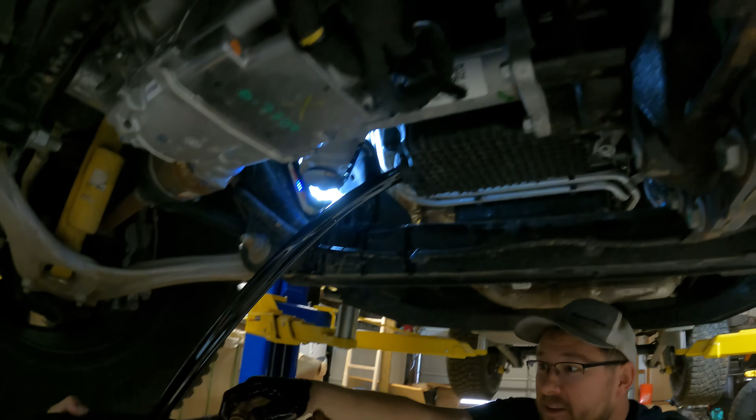I'm a little jealous, but we're in the shop. We're gonna get a lot of stuff done today and over the next few days. We're just gonna hop right to it.

This is a kind of small shop, 30 by 40, 1,200 square feet. Really, compared to what I've had in the past, it is amazing. But in order to maximize the room in this shop, the plan is to build a loft in this corner. The setup for the shop, we have the lift, and Cassie and I built a workbench over here in the corner. This is gonna be our primary work zone. We're gonna have another bench here, and welding and whatnot's gonna be over in this section.

Over in this corner, we didn't really have any plans for it, so this is gonna be the chill corner. We're gonna have a loft so the kids can go up there and play, have a little couch in the corner, and then have storage up over here.

So first things first, we have to build the loft. It's just like that rear winch, simple, you just build a loft. How hard can it be? Just like every other project. Do we have the supplies needed to start this? Probably not. Do we know exactly what we're doing? Of course, we have the baseline. Let's do it.

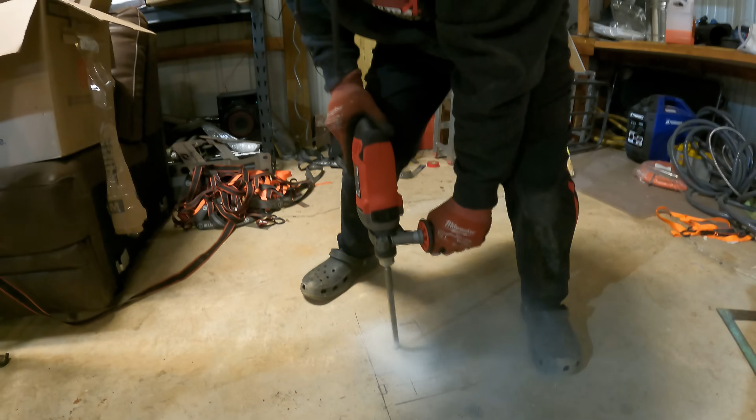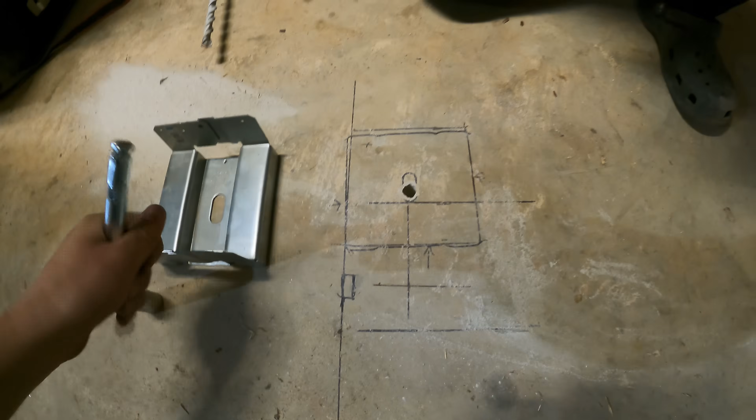We use the post and the 2x10s to square everything up and mark our base plate. So we just drilled a 5/8 hole in the concrete and we have this anchor bolt. That plate is gonna anchor our post and this is gonna tighten down and expand in the concrete.

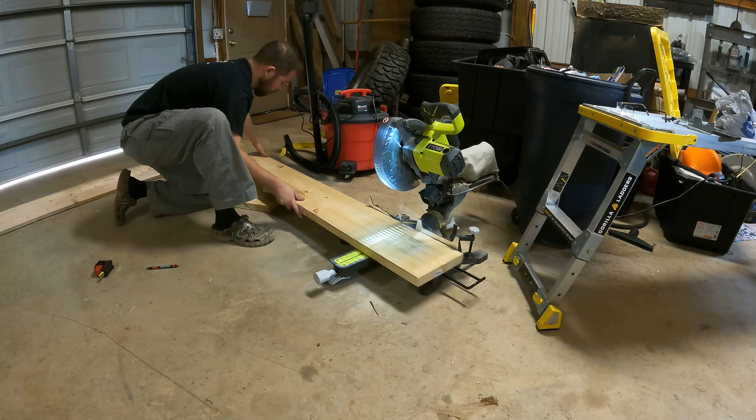I've pretty much come to a complete halt on the loft build. All the 2x10s are in place, this thing is secure. I did some swinging under here to make sure it was all good, and I went ahead and put some old 2x4s up there as temporary flooring so I could crawl up there and make sure everything is secure. Let me tell you, this thing is not going anywhere. We're still gonna tie it in, I'm gonna do some triangulated brackets on each corner.

For now, I need to figure out what kind of floor we want to do. The 2x4s, while they're nice and sturdy, that's definitely not a good floor for the kids to play on up there, as well as the ladder going up. We're either gonna do a side ladder out of wood, or put the ladder up against that wall, recess it, and have a cutout on the floor so you walk up and over. But it is time to go ahead and head over to Mike's.

We're gonna change out all of the beadlock bolts on mine because they are looking really, really rough. Sadly, living down in South Texas, it's bad on these bolts. Hopefully none of these break on the way out, but you can clearly tell they're heavily corroded. So we got a bag of grade 8 hardware over there, we're gonna swap these out and keep on going.

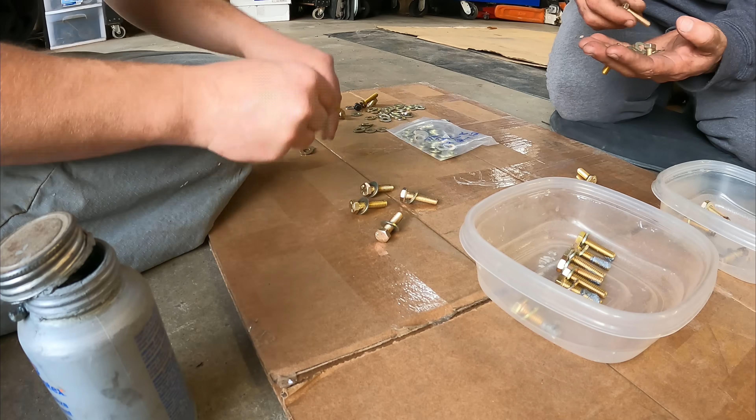We went ahead and got all 4 wheels swapped with new grade 8 hardware, new beadlock bolts. So Mike helped out, thanks Mike. But the big thing is, whenever your beadlocks start rusting, or if you just had them for a few years, you definitely want to change out that hardware because that's what holds your bead together when you're going down the road.

Luckily, we have a store here in town, Barton Bolt. Great place, they do have an online store, grade 8 hardware, all kinds of fasteners. Go check them out, their prices are unbelievable. They beat everything else, Fastenal, your Home Depot prices are insane there, very low. Tractor Supply, yeah, it beats them all.

So we swapped all of those over. I think it cost what, 40 bucks for the bolts and washers, 60, I don't know. Online it was looking like it was gonna be 200. So that is done.

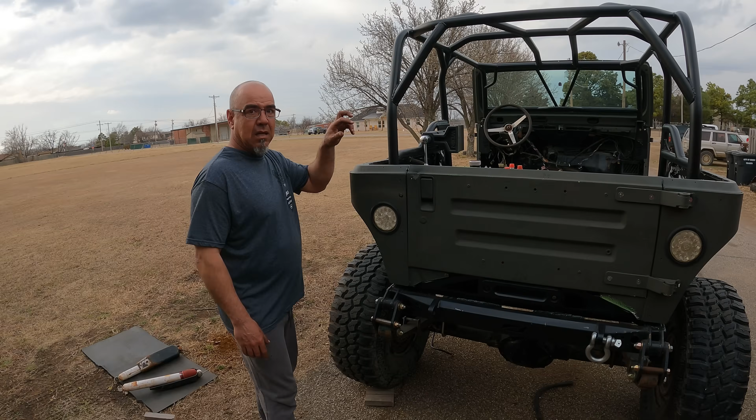Mike spent the past three weeks working on this, and it turned out really, really good.

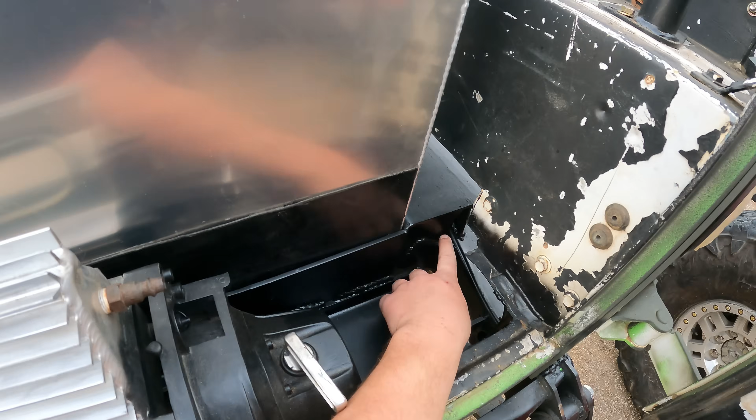You had a custom fuel cell mount made. Yep, we used a Barnes 4-wheel drive 30-inch winch mount, and everything else kind of fabbed together. It turned out really, really good. It's welded over here to the frame right here, multiple spots all over. And we cut the body out. It turned out really good.

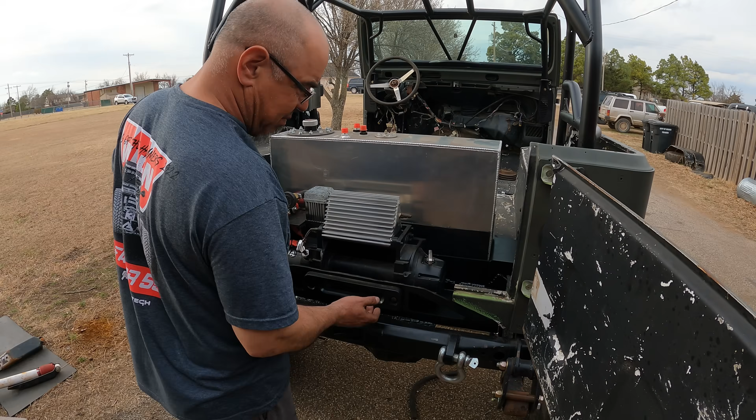Once we figured out our plate setup for how much depth under the tailgate, I didn't want it through the bumper because everybody always goes through the bumper. Welded the 30-inch to the gas tank mount, and it was all quarter-inch steel. It is real tight.

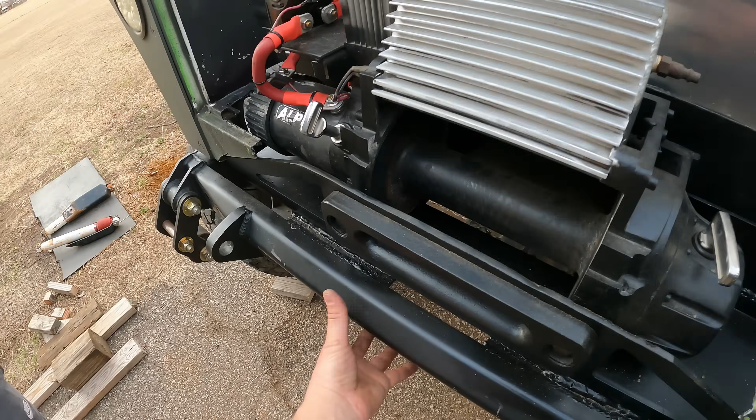Down in here, we are gonna have to massage the brackets to hold the gas tank down. The good thing here, you open the tailgate and you have room to change your winch cable if needed, unspool it if it's kinked up. When it's up inside the bumper, way in there, it's super hard to get to.

Now you have a winch and an air compressor. This is the ranch's off-road recovery rig, so of course having a winch on the front and rear is a no-brainer for a recovery rig that's gonna be pulling people out of who knows what.

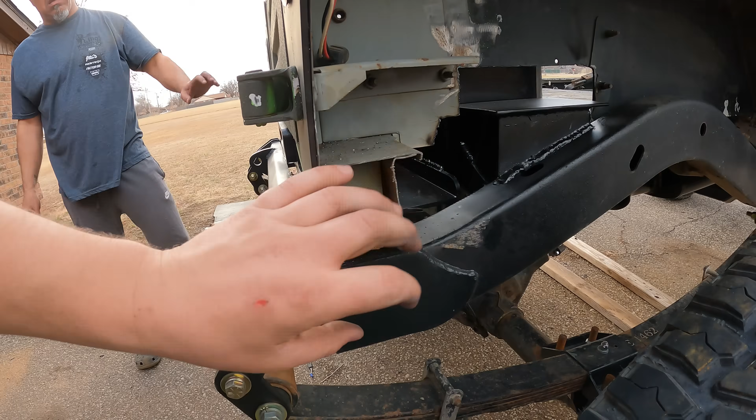So there's still more work to be done. You gotta brace the corners, and either make a body mount here or tie the cage into the body a little bit and then into the frame. Got some work to figure out, but it is coming along good.

So I'm actually up here on the loft now, and if you're standing on the corner there is plenty of room, but back up in there, that is definitely kid zone for sure.

So I went ahead and got the floor in. I used two sheets of 3/4 inch sanded plywood, and it was the perfect amount. A 4x8 here, and then a sliver there, and the other sliver fit right in there.

The next step, as you can tell, is carpet. This has like a red tint to it. The lighting up here is horrible, but I figured it would kind of look good, plus this is extremely cheap. I really lucked out on this. This was from Ollie's, I think it was 65 bucks, and I would love to say that I planned this out, but I didn't.

The width is perfect, this is like a 12x8, so all I have to do is unroll it, make one cut, staple it up here. Of course, add some safety handrails right here. But this thing is sturdy, it's not going anywhere.

We're gonna finish this up tonight, which means the loft project is done, and we gotta bring the JK in here, put her up on the lift, and make some changes on that thing. But let's get this stapled down first.

So we got the whole crew in here. We got Cassie, we got Mike, we got the LJ, we got the JK. We're missing a CJ—Mike, where's yours? Running. Running? Running and driving. You're talking crap about the JK right now? And it runs. All right, put it on the trailer, take it to the trail.

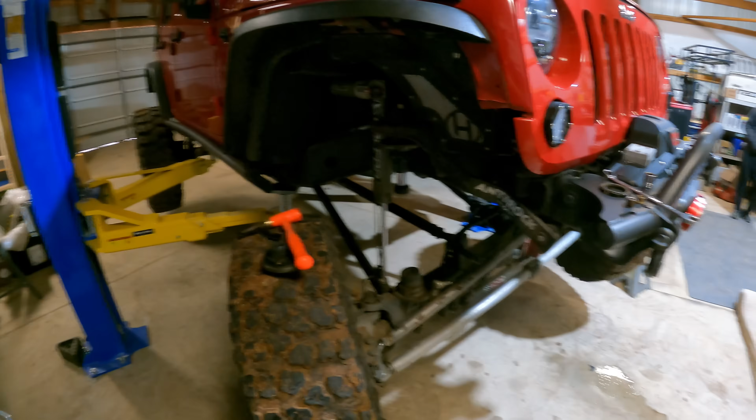So today's project is to swap over to the Rock Krawler 3.5 diesel spec springs. Let me put these down—these are quite heavy. These are the diesel spec springs for the JL JT 3.5 inch with the EcoDiesel engine, and what this is doing is giving us a better spring rate.

Now, why do I need that? Mostly it's because of the 392 Hemi. What I noticed is we didn't lose too much ride height, however the Hemi being heavier, the spring rate on the front end just felt way too soft, uncontrolled, not really stable. So by going to a stiffer spring rate, it's gonna be perfect on this Jeep.

Now there's a bunch of differences between linear spring rate, dual rate, triple rate, coilovers, and there's just a ton of different spring options. So sometimes it can seem hard or a little bit confusing to figure out what springs you want for your Jeep. So I did a real quick whiteboard demonstration over here.

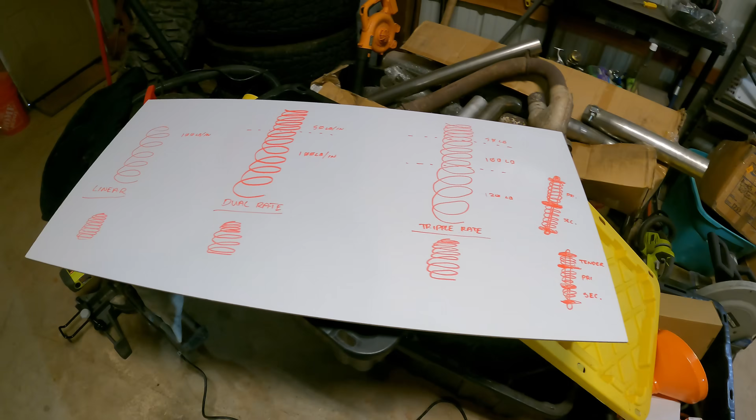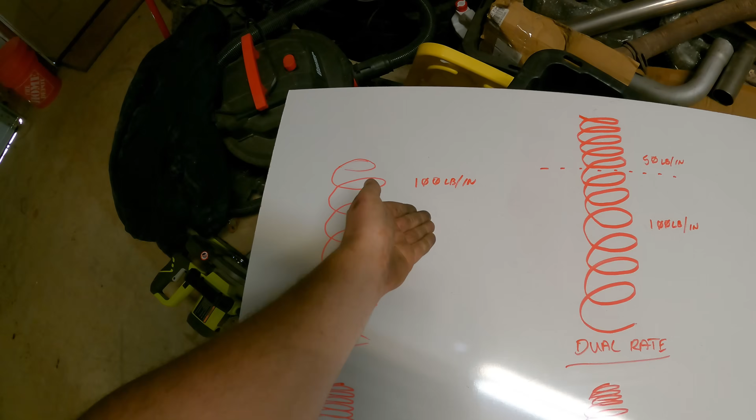We're gonna start off with a linear spring. A linear spring, for example, might have a 100-pound spring rate. So all the way through, if you put 100 pounds on here, it's gonna compress 1 inch. So if we put 300 pounds on this spring, it's gonna compress 3 inches. So that's your linear rate spring. That's what comes from the factory.

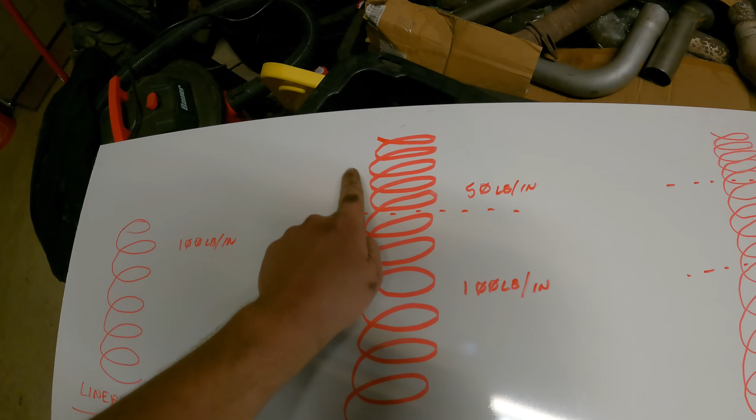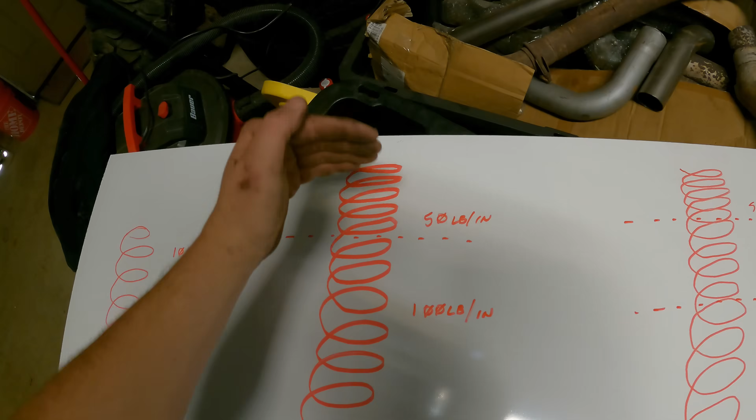Very basic design. We're gonna step up to a dual rate. A dual rate has a different spring rate on top, and then the coils open up to a different spring rate. For this example, the top is 50 pounds per inch. Most of the time that's gonna be fully compressed, unless we're flexed all the way out, this is gonna expand in our coil bucket. It's not really gonna do much because this is mostly for the bucket, just staying in there. Then we move over to the 100 pound per inch spring rate, which is very similar to that, but we added a little bucket on top.

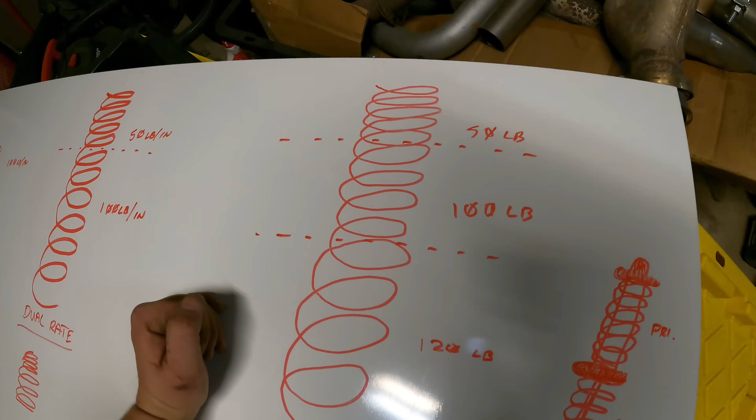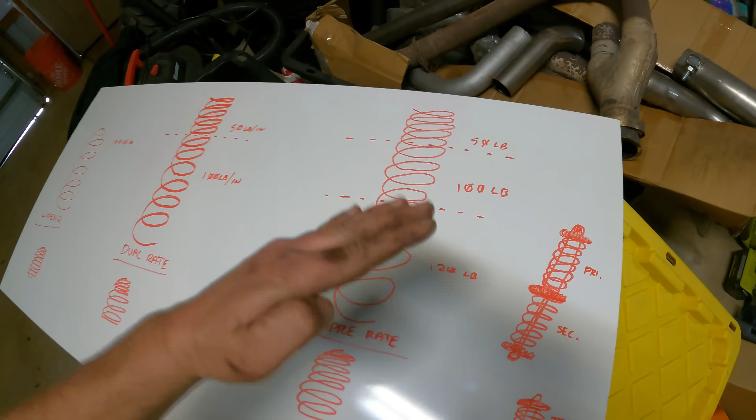Now we're gonna move over to a triple rate spring, and just like it sounds, there are 3 different rates. In this example, we did a 50-pound, 100-pound, and 120. So a benefit of a triple rate over something like this is that not only do we have the 50 and 100 for the smaller, squishier bumps, but we add a 120 in here for some of those bigger bumps that can really absorb it without bottoming all the way out.

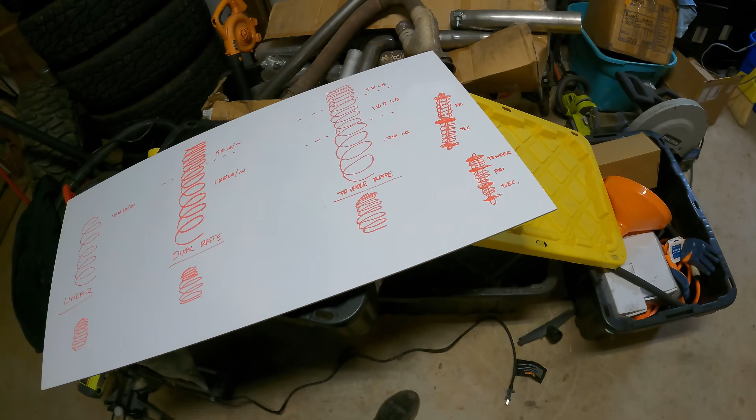So linear, dual rate, and triple rate are your basic designs for springs. Triple rate's gonna be Rock Crawler, and it seems like a lot of other companies are following suit with the triple rate spring. So of course, we have an example of a dual rate coilover right here and a triple rate coilover. As you can tell, it's very similar to these springs, but with coilovers, you can really dial it in to exactly what you want. Now in the future, the JK is gonna get coilovers, but I really wanna make sure that we do it the right way, and I really wanna have enough time to explain it to you guys.

But with that being said, we are switching over to 3.5 inch Rock Crawler springs. We're gonna see what it looks like. It should feel better. Hopefully it doesn't give us too much lift, but with the engine, I think it's gonna be perfect. That was a lot of talking, a lot of good info.

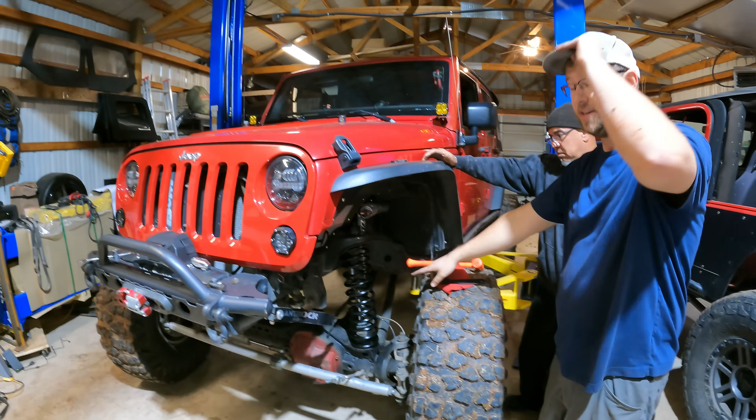So I just talked to Rock Crawler. The diesel springs' primary spring rate is 175 compared to the JK front springs, which are 155. So we got an extra 20 pounds per inch up here, which I think should do it. I don't think it's gonna give us any extra ride height though. I think we're gonna be in the same ride height, but with a better spring rate suited for the Hemi.

Pull it out of the garage and see what it looks like.

Door was open. Oh God. Oh, oh man. Oh, all of those times back in Virginia when I got yelled at for driving through the ditch of doom, and she leaves marks in our nice field that has some— oh my, I was just showing them our nice crop that we're growing. What do you think it is? I have no idea. There's corn or something up here, but it doesn't look like last season had much. So I have no idea what it is.

That's honestly the perfect stance right there. It still has a tiny amount of rake, but it's not obsessive. So the stance is good, the ride height is good, but we're gonna have to take this thing wheeling to actually get a feel for the spring rates. I've been running the old JK Rock Crawler springs for a couple years now, and I really did like the way they rode, but with the Hemi, it was just a little too soft from the extra weight.

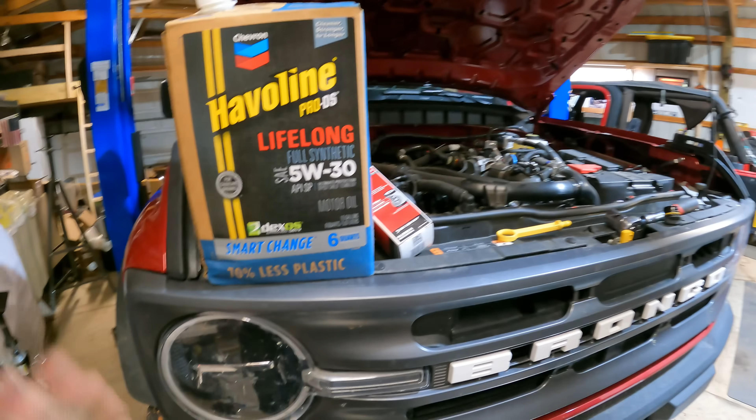The 2.7 is supposed to use 7 quarts. A lot of people are saying they only get 6 out and 6 in before it's full. That's probably because this is twin turboed, so you have all the oil feed and return lines for the turbos, and that oil doesn't all drain down. That's probably where that extra quart goes.

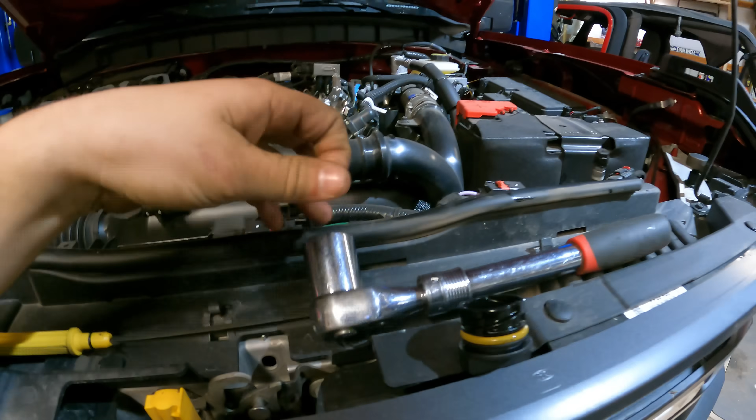Before we start the oil change, we're gonna pull everything out and make sure we have a very important socket. It's supposed to be a 27 millimeter, but ours is somewhere in a box, so an inch and 1/16 is pretty close to pull off this plastic oil filter cap.

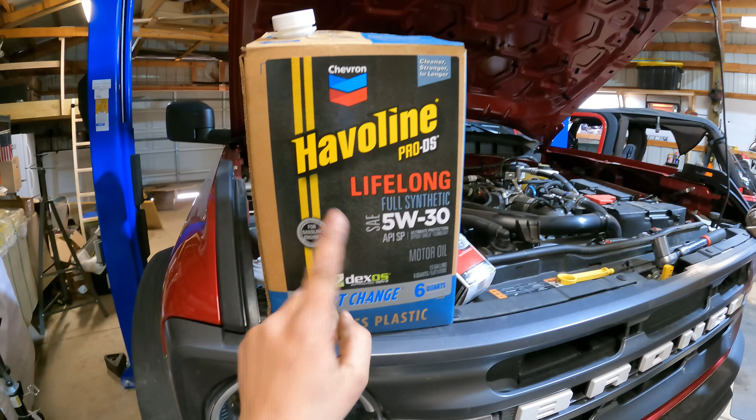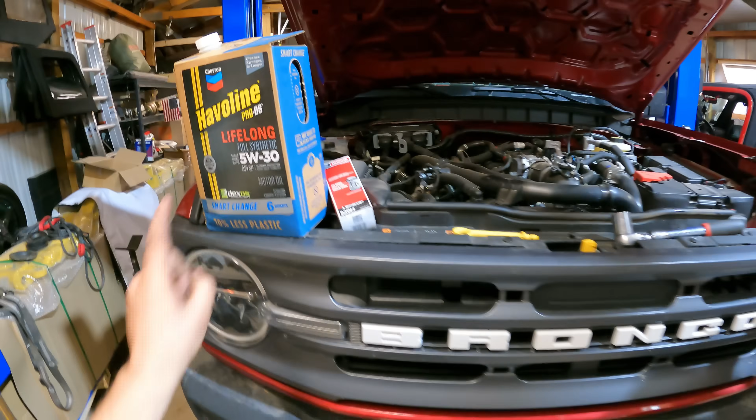We are gonna go ahead and get the Bronco oil change done. We're gonna have to raise this up, and it's gonna take us an hour. We're gonna figure this thing out. So it's not a bolt, it's a plastic contraption. I don't know, Ford.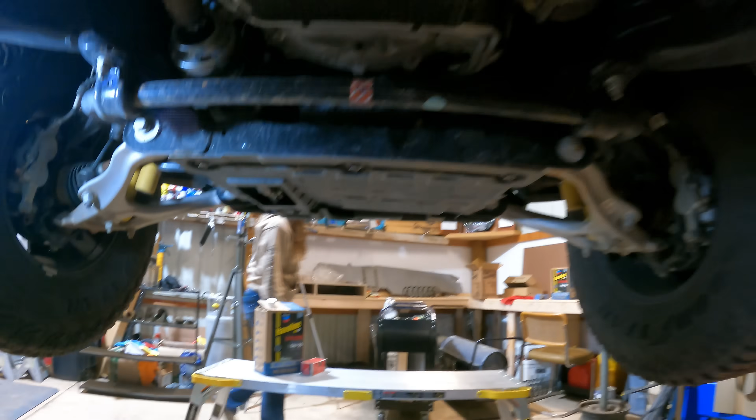What are you looking at, Mike? The plan is to rearrange that truss up, use steel and do a cutout inside there so we can lift it all the way up. But what I was just saying about the Ford crap up in here — we have to drop this factory skid plate. I don't know if you'll be able to see it in there, it's actually on this side.

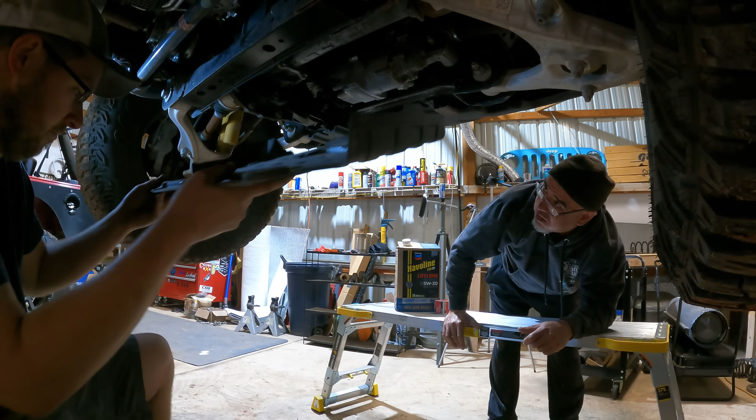There we are. So that is our oil pan, a plastic oil pan, which is fine because we have skid plates to cover it up. But this is what Ford likes to use as a drain plug, and I've never used this before, but I don't like them. Probably tells us exactly how to do it in the owner's manual.

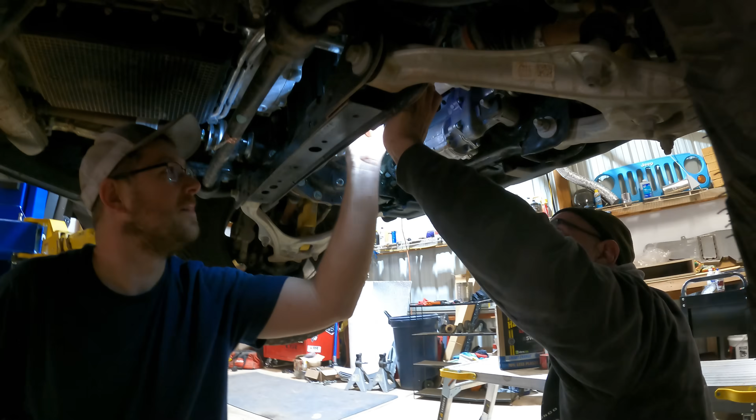How many men does it take to do an oil change? There's no better way — you can't even get your hands up in there to get them out of the way. Oh man, here we go. Oh my, that is horrible design. That is just the worst design I've ever seen. Hey Cass, get the other one ready.

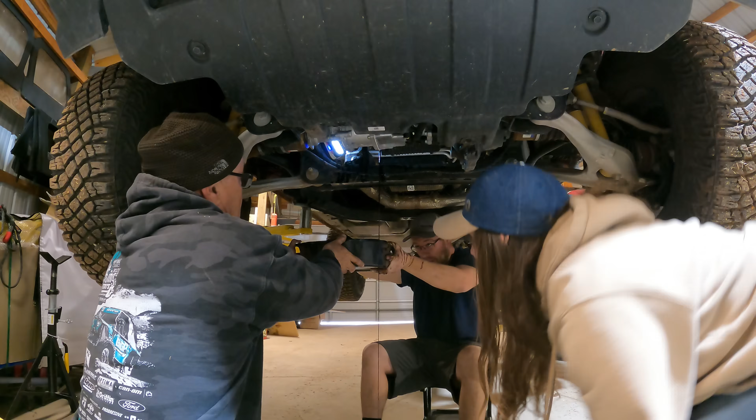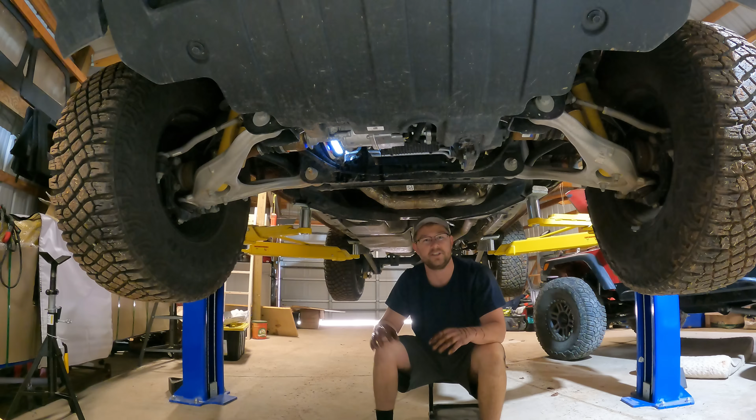Just, yep, one, we got about... yep, 3. You need to hurry. 2, 1. All right, yep, that's definitely more than 6 quarts. Oh my God. All right, yep, perfect, great. This is probably why they say every 10,000 miles, because nobody wants to do it any sooner. This sucks. Oh, I missed, there's a mess on the ground.

Ford Bronco did not take a page out of Jeep's playbook in regards to the oil plug. I'll just wait till it's done. How do you have a multi-million dollar R&D team and somehow think this is the best way to do it? Like, who the head of engineering was like, 'you know what, Bill, this is just a great design for the Ford Bronco. All Fords, I think we should do this across the board.' It makes sense. All right, I gotta roll.

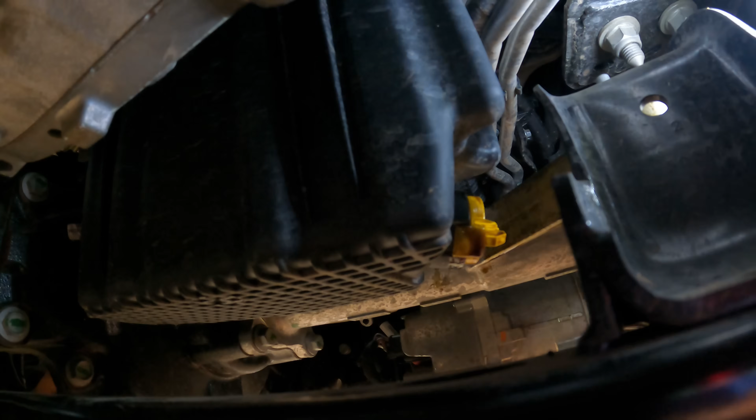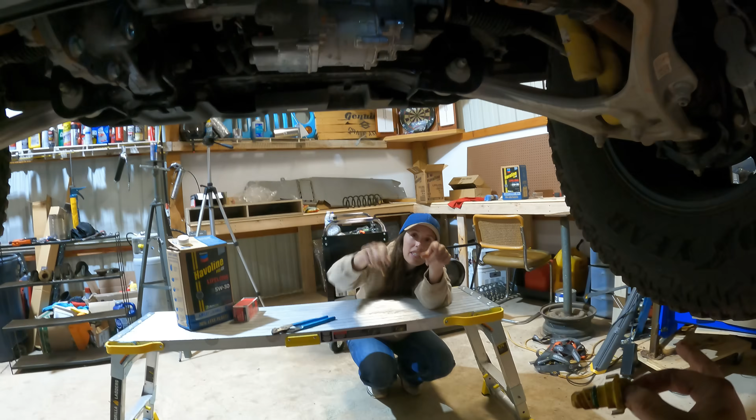So here it is, we have to turn it out of those tabs — there we go, a little hard at first, but by the time you open it up and get your hand out of there, you're covered in oil. The oil shoots that way, so I'm wondering, do you need to be standing over here with your arm over here and pull it this way real quick? Maybe so, that way, because it shoots out — if you can get your hand down, maybe that's how people do it. Maybe, I don't know. We'll try again in 10,000 miles.

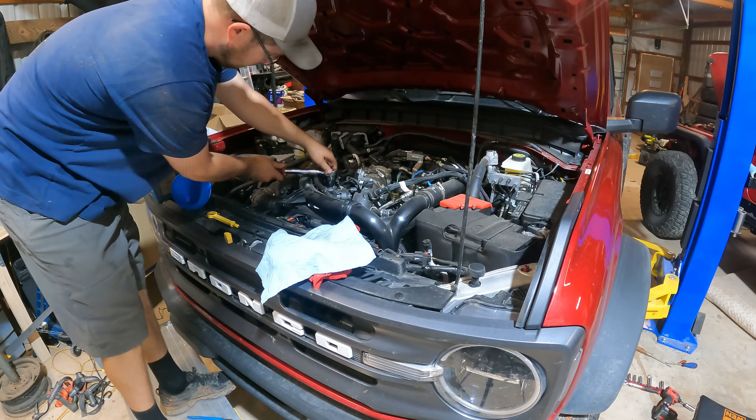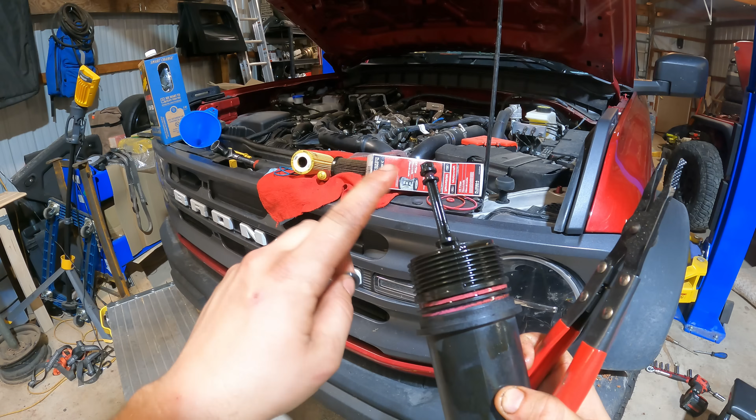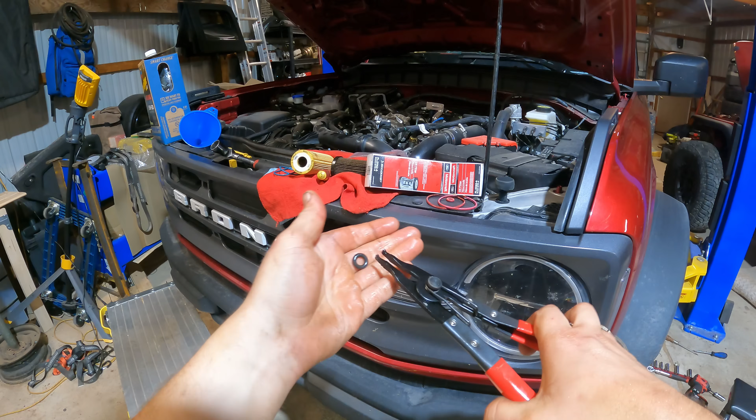Just like the JL and JT design, the oil filter cartridge is the same, except a little longer. We have 2 sets of O-rings on the seal housing, opposed to just a single O-ring. The replacement O-rings for this filter are insanely tight to get on, especially this tiny one. I'm not sure if you have to change it each time, but I figured I'd go ahead and do it. Without snap ring pliers or something to expand this O-ring, it's almost impossible. Gotta be careful because I don't want to stretch the O-ring too much.

With those 2 projects out of the way, I think it's time to close this video because we have a ton of work to do. The LJ, Cassie and I are gonna start swapping all the wiring harness, the ECM. We're gonna swap over to the Holley Terminator. It should give us a better result, but Cassie will talk about that in her video.

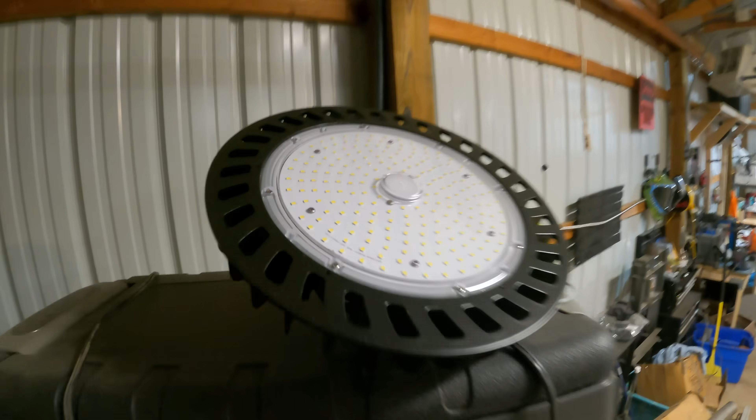We also have plenty of other shop upgrades to do. Those are the Hyperlite LEDs I've been talking about for a while. As you can tell, I'm only running one in the shop, but we have a few more to install. A lot of shop upgrades coming soon, a ton of content on the Jeeps, a bunch of projects. We're going wheeling to test out the JK, and hopefully we can bring the LJ with us too, because I know everybody wants to see what this thing's gonna be capable of with 37s, long arms, LS swap, and an LJ. It is gonna be sick.